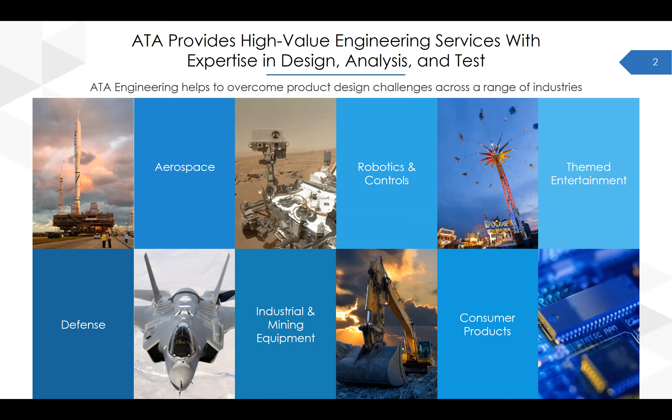One of the other things ATA Engineering does is that we are a value-added reseller for the Siemens Digital Industry Software Suite. We offer training and a lot of free resources, as well as hotline support for a variety of Siemens products, including NX, which is the subject of today's webinar.

The Siemens product lines that we support currently include NX CAD and CAM, Solid Edge, SimCenter Star CCM Plus, SimCenter Femap, SimCenter Nastran, which was formerly known as NX Nastran, SimCenter 3D, and Teamcenter.

We offer a support hotline for all the products we sell. And very interestingly, we are also the developer of the official SimCenter Nastran training materials, and we are the preferred North American provider of SimCenter Nastran training. We are a Smart Expert partner and a platinum level solutions partner with Siemens Digital Industry Software, with validated expertise in Femap, Star CCM Plus, and SimCenter 3D.

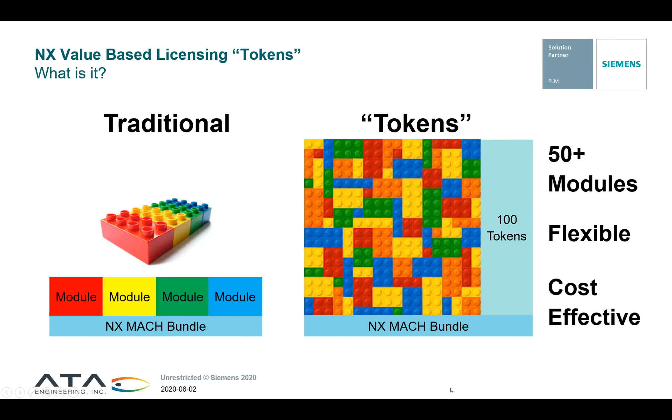It provides a really flexible approach to using the different modules, as well as a cost-effective way to do this. So instead of having to buy one of each of these modules, by buying just the token pool, you can access over 50 modules within the NX design environment.

So how is this licensed? The main way we license it is value packs. You can buy them in 100 or 50, just like you would buy any other NX license, so there are product codes that the ATA team can quote you and sell you. They are on a subscription basis, so there's no perpetual option. Again, the numbers are either 100 in increments or 50, and you can mix and match them together. This is a floating mechanism, so you put this onto your license sheet and your FlexLM license, just like any other module, and it will move around to any of the designers within your organization.

Some frequently asked questions around this: tokens are focused more on casual usage of the design modules. If it's a specific thing, again advanced sheet metal is an example, and you're in that every day using it a lot, tokens may or may not fit that bill. If you go in every so often, that might be a good way to use the tokens to access that functionality, but for ones you're in all the time, you might still go with the actual add-on module.

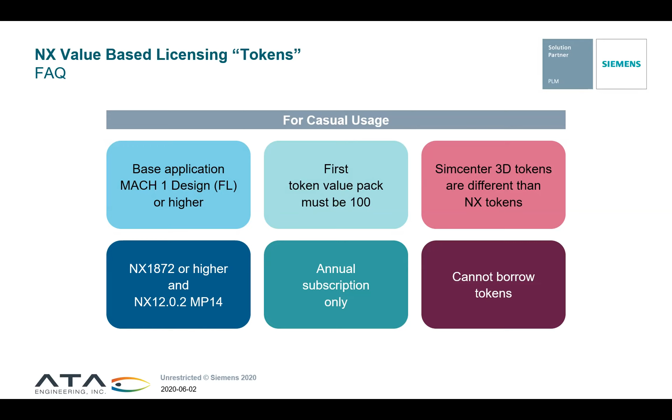As I mentioned, it is subscription only, so you do have subscription, and this is set up on an annual basis. That's how they are sold. The other thing is, from a borrowing perspective, we cannot borrow the tokens. So if somebody wanted to put those on a laptop and go remotely, that's not something we make available at this time.

So how does it work? What's the mechanism for the user? Do they have to do anything special to be able to access this? Let's look at a simple use case. If we had 5 users, say they all had the Mach 1 floating seats, and we had purchased a 100 pack of tokens.

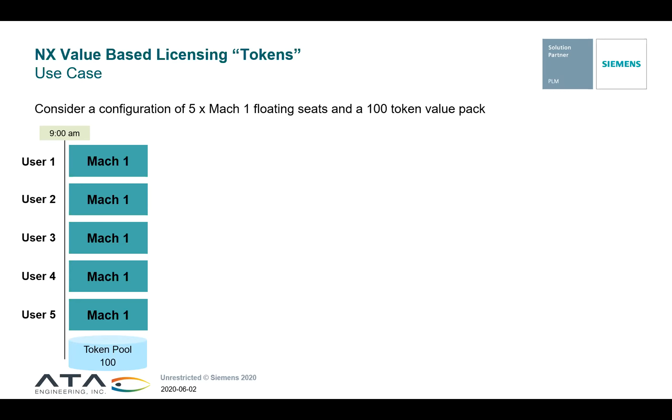So with that, you can see each person is going to be licensed with the Mach 1. And then we have the token pool at the bottom of 100.

So if I started off and I wanted to use the human modeling, each module within the token pool has a little bit different value based on what their list price cost is. In this case, human modeling requires 26 tokens. So from our 100 token pool, it draws that down to 74.

So there's 74 tokens for the other 4 users to access. I might continue working, and now maybe user 2 steps in and starts using the Realize Shape. That pulls another 35 tokens out of the pool, so now we're down to 39.

At this point, if the other 3 users would like to access something, as long as the functions they're going to pull are not above 39, they're good to go. If it was above that, they would have to wait until somebody was done.

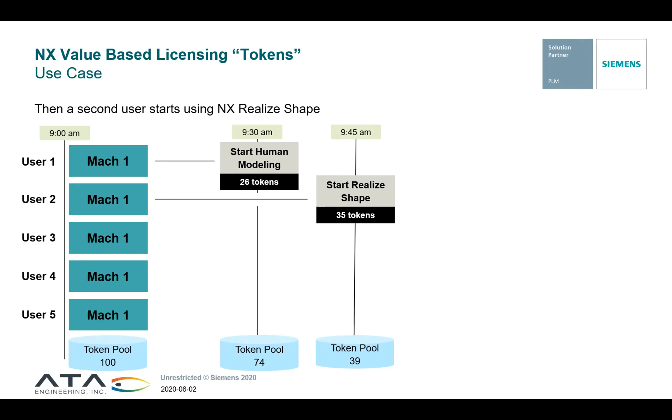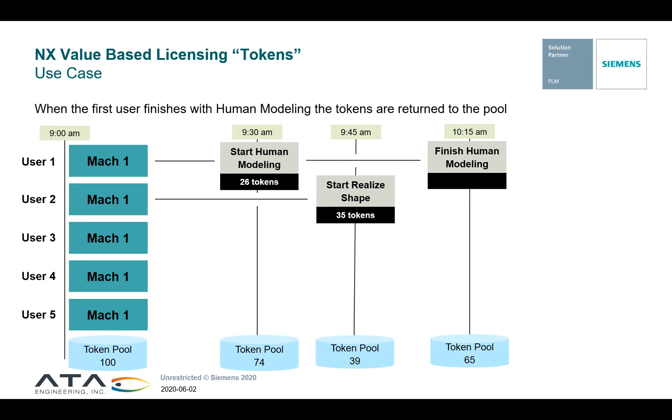So just like that, if I finished after maybe 45 minutes working with the human modeling, those 26 tokens go back into the pool. You can see we've bumped it back up from 39 to 65, and other people can go in and use functions off of the token pool.

Same thing, maybe another user comes in and starts the routing base, pulling 25 tokens there. So that fluctuates throughout the day and the hours people are working on it, but it's just like floating licenses you'd have. You go in, use so many, and put them back.

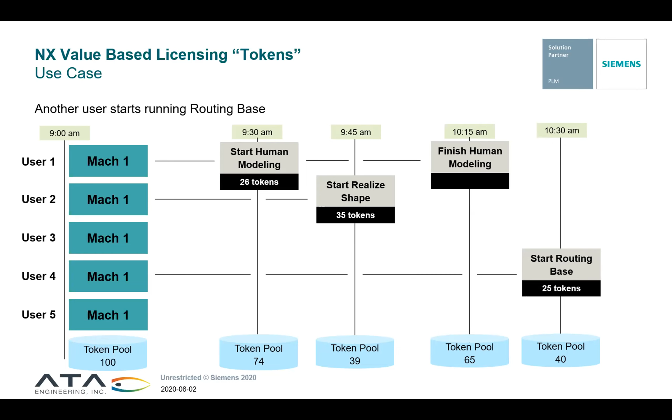So you always have the 100 tokens. You're not throwing those away when you're done with it, or it doesn't completely lock those up. It is that pool, and the level of the pool goes up and down throughout the day.

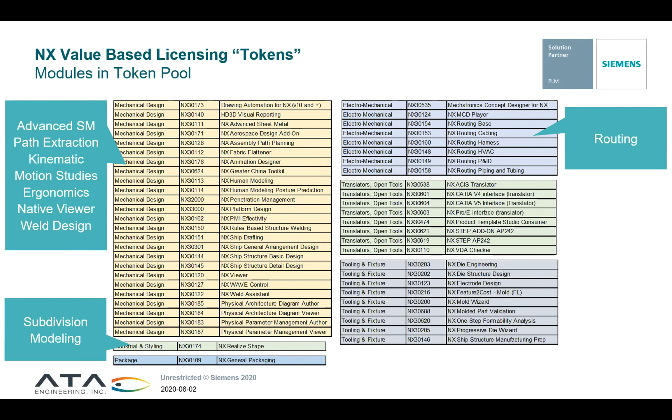And then another area is our routing capabilities. So whether you're doing harness design, piping and tubing, all of those things you can access through the tokens as well.

And then another one we talked about were the translators. We have some direct translators for CATIA and the Pro-E interface inside Pro-E Creo. Also some specialized ones for ACIS, which is the Autodesk modeling kernel similar to our Parasolid, and Step 242, which helps with model-based definition. Those are some things that would be very valuable.

Again, things on a casual use basis — we're trying to go in, translate something, bring it into the system. And then also a number of tooling and fixture design: many of our tooling wizards, whether Mold Wizard or Progressive Die Wizard, any of those types of tools are in there, as well as costing, tooling costing, and sheet metal flattening.

So for complex parts, we use the one-step formability. And then finally, if you look across the list, there are many industry-specific tools that we have created, and those are available through the token pool.

So we have aerospace design. If you're doing aerostructure design, there are a number of tools focused at that industry. Things like ship design - for those building cargo ships, container ships, anything like that, there's a set of tools available. And for the automotive industry, we have our vehicle design automation, which you'll see examples of as we go through the rest of the demos. Finally, for the machinery industry, the mechatronics concept designer helps with motion studies as well as connecting out and performing virtual commissioning.

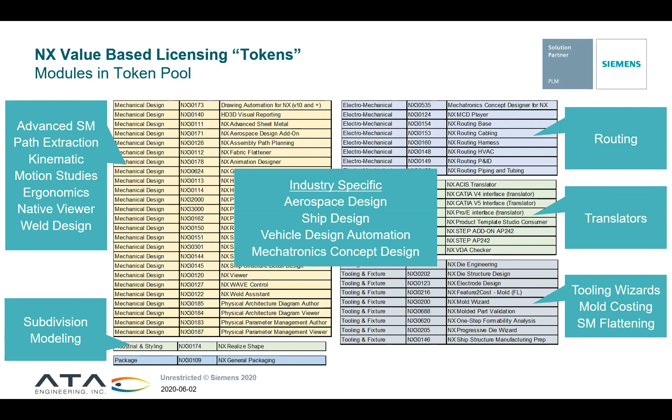So let's take a moment and look at some of that functionality. We won't go through all of them in this short time, but let's look at some of the key ones we have here.

One thing a lot of people ask me about is, I'm working in assembly sequencing, which is part of assemblies, but I'd like to figure out how to extract that part from the assembly. In this case, we're looking at an aerospace example - can we remove that seat out of the plane without hitting into things? Do we need to take other things out? This is a high-level example, but a more realistic one you might run into is...

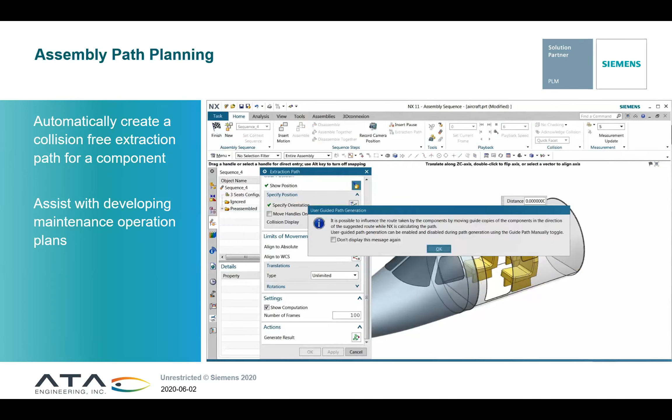We're working in an engine compartment, or working to remove some pieces, and we want to help develop that maintenance operation. How do we let the system calculate and figure out how to get that part out of there? Could we get it without having to take all these extra pieces off of, say, the engine or whatever compartment we're working in? So what this allows you to do is go in and specify the start point and the end point.

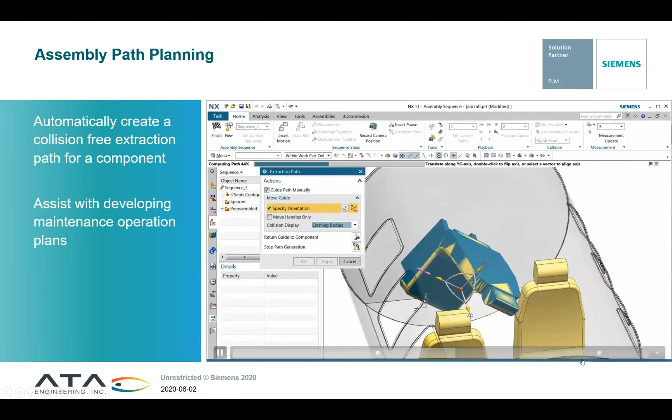The system will then go in and figure out that calculation - can it in fact be removed without colliding with the other parts in the assembly. One nice thing is, besides seeing the actual extraction path, it also creates a faceted body that shows the path that solid has taken, something like a swept solid that shows you that.

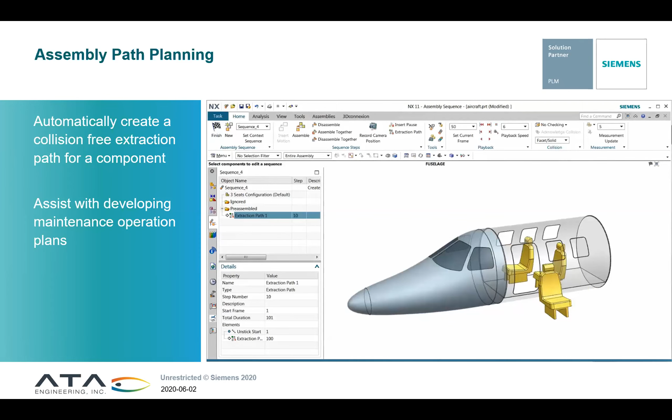So again, something that some customers wouldn't necessarily go out and purchase by itself, but by having it in this pool, now you have a productive tool to help your designers. Another one is human modeling.

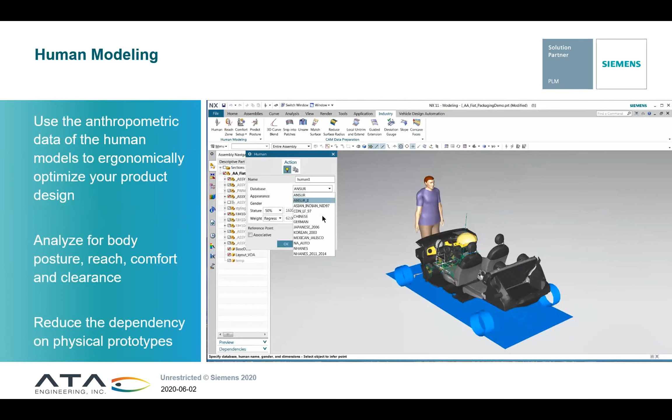We have the powerful capabilities of our Jack and Jill software, and we have much of that built into the NX environment. So we have the anthropometric models that we can put humans in. Why would we do that? We'd want to look at their posture, what their reach zones are, how comfortable are they - it looks at all the ergonomics of the people. You can check for clearance and for vision.

And that's really what we're showing here, that you could go in and add those into the model. Now you say, well, we just dropped them in as standing, but you can control them and set them up. So as you're working, you can go ahead and put them in and control how their hands are gripping, how they're seated, how their legs are bent.

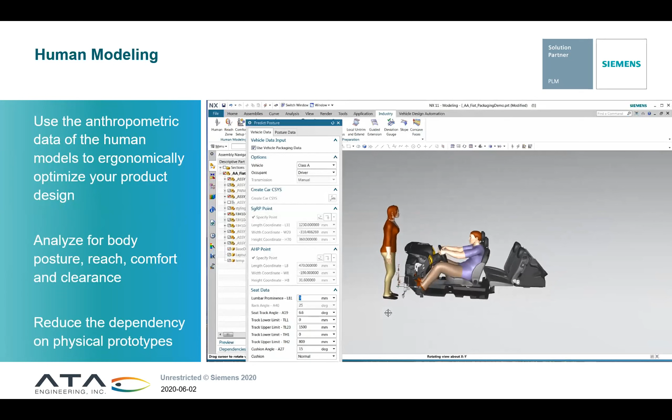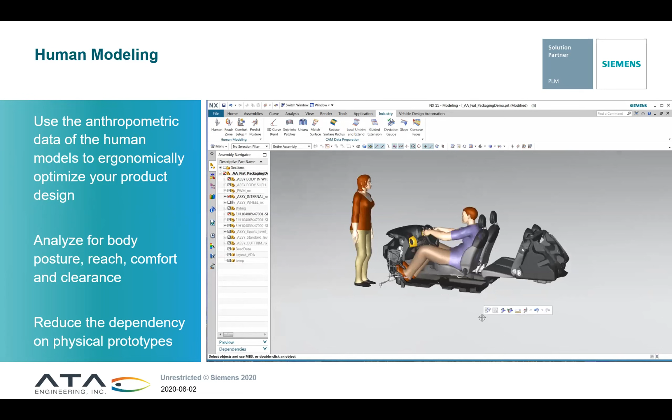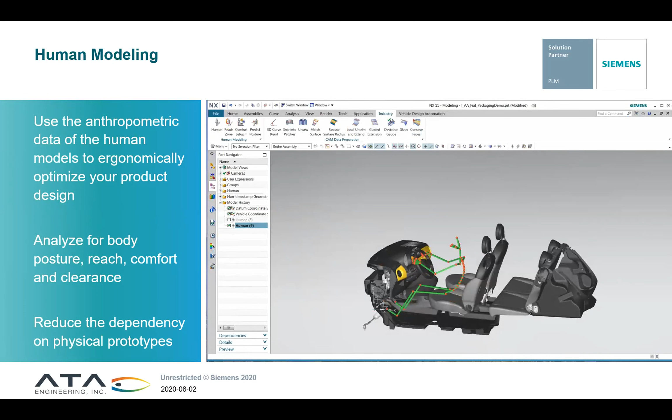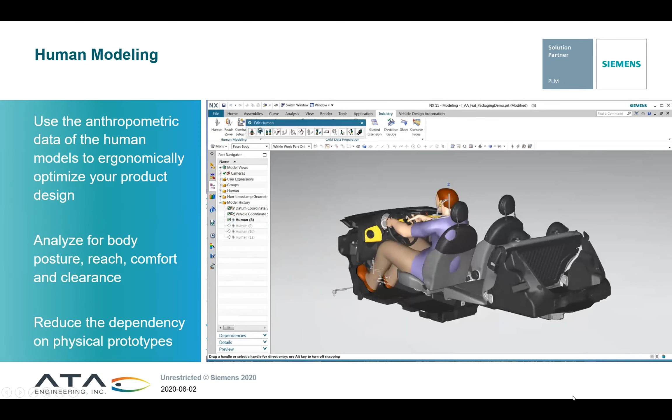But you have all the actual data about those people based on the 50th percentile or the 90th percentile - how would they go in. So whether it's automobile, aerospace, or heavy equipment you might be designing, you can see how you can add those people in and use that to study the difference. There's a big difference between, say, the 50th percentile male in the vehicle versus a 50th percentile female - what problems might we have with either person besides just moving the seat up for reach and other things?

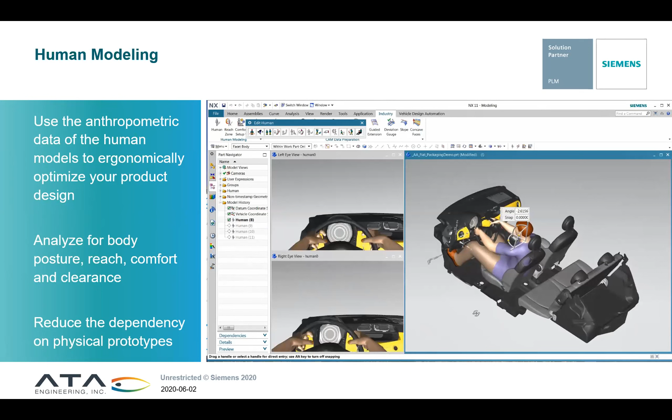And as I mentioned, the other area is vision. Just by moving that occupant's head and using the drag handles quickly to move that head as they look down, right or left, you can see what they can see on the instrument panel, or if you had them in the entire vehicle, where they have blind spots, where they can't see as they move around and look in there. So again, trying to reduce those physical prototypes, you can see how much you can get done inside the human modeling.

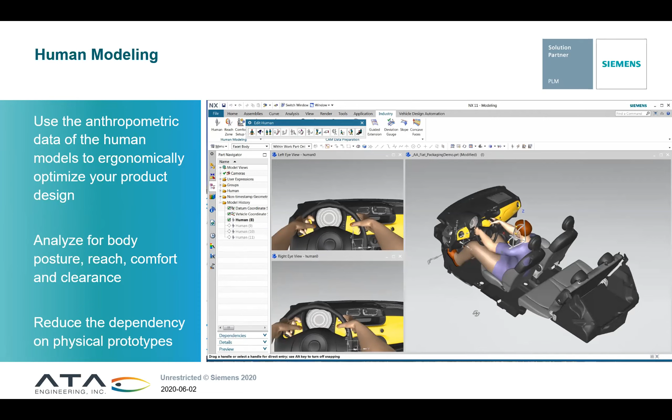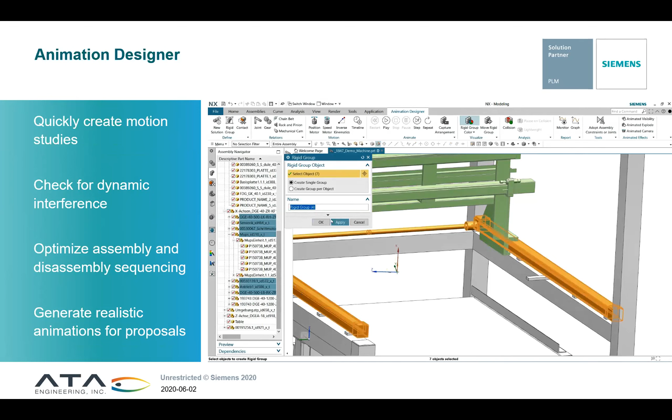Another tool that comes in handy, using more of a machine design example here, is the animation designer. This tool has been in NX for a couple releases. It's really a step between just doing assemblies and assembly constraints, and going to full NX motion. It's that intermediate spot where I'm not really worried yet about loads and accelerations. I just want to put something into motion, check for interference, see how the entire kinematics of it move, and determine, hey, do we need to extend something? Do we need to adapt?

It's a very visual environment. As you go in and select the groupings of the components, you can either use the on-screen selection or do things from the assembly navigator. As you're building that up, you also see the coloration on the screen, showing the different groupings, as well as applying the different joints that connect those up to one another. A very simple process.

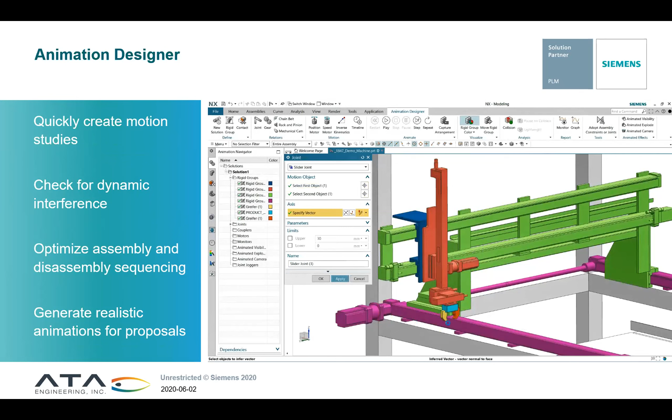What's nice is this is all scalable. As you move from assemblies, you could inherit those assembly constraints. As you move into motion, you can pull this information forward. So things you might see are physically dragging it with the drag handles, or you can use the timeline. We can put different things to showcase, hey, with these position motors, it moves it to a position. It's easy to copy and mirror so you can show it going out and then coming back, and very quick to set those up.

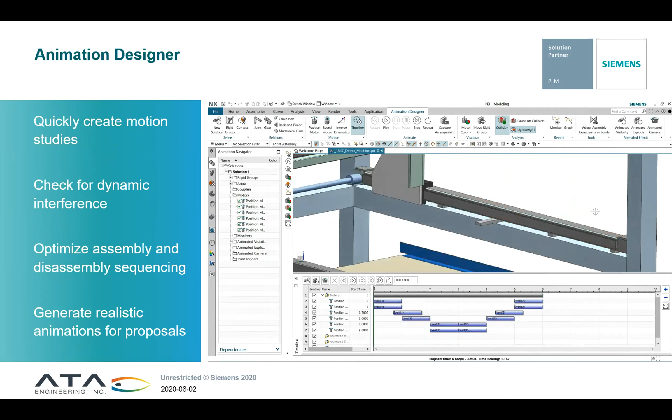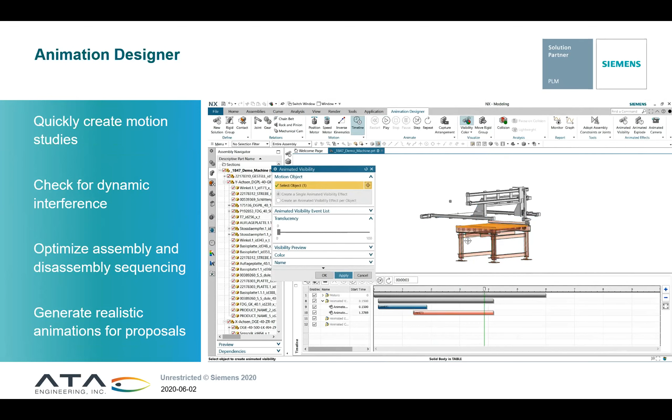Right away you can check interference, measurements, all of those types of things that you can build into the design. Finally, one other area people use it for is to create realistic animations for proposals. Instead of just giving them drawings, you can capture this information and create an animation of it. You can have things turn on and off, have exploded views of the information, all using just this graphical drag and drop to develop those. That gives you a chance to see the final product out of that.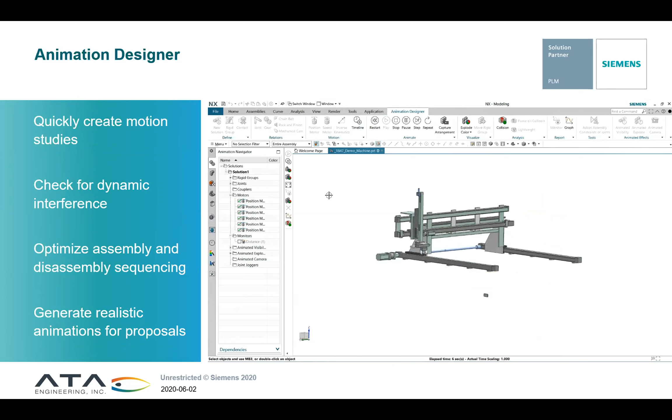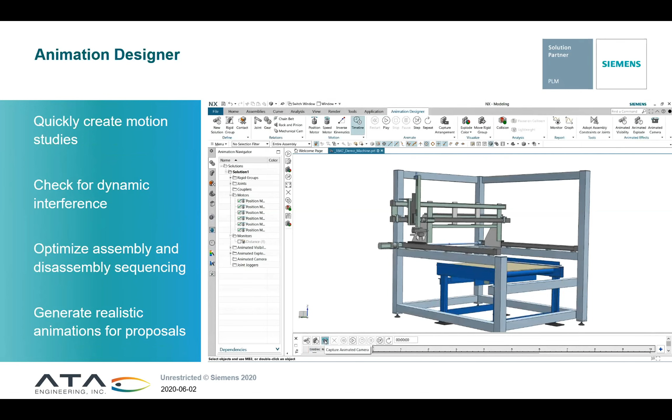So a number of tools inside of this animation designer really come in handy. And again, under normal circumstances, somebody would have to buy the add-on module. Now with the token pool, you could access and make use of this.

Another one that's industry focused is aerospace design. There are some very specific things as you're doing aerostructure development, like the flange so it matches up to the skin of the aircraft, the way the ribs are developed, or the shelf and step as these stringers come together. Very specific things that would take a lot of extra modeling time if you just used standard functionality.

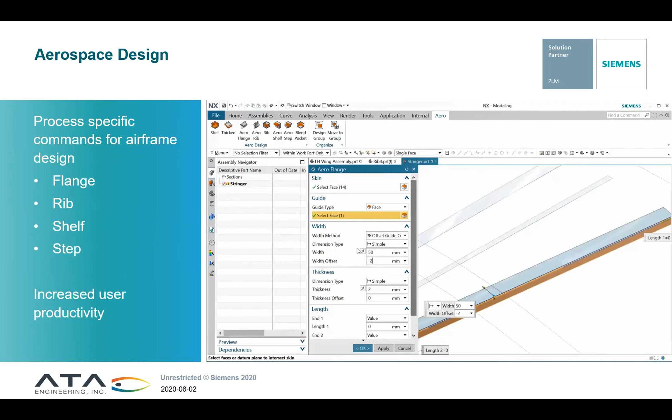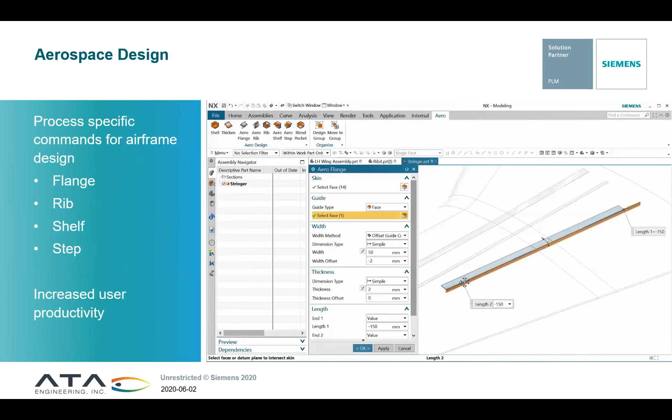These are very similar to using NX sheet metal, very similar look and feel for the user, with the on-screen preview, the drag handles, all of that. It really speeds that process along as you're working on those interior structures for the aircraft.

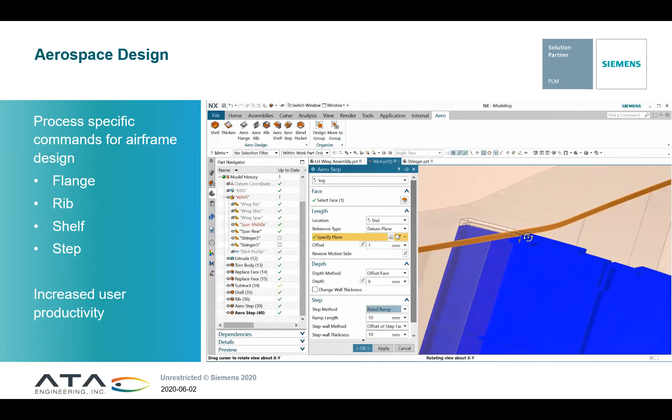We looked at the flange, and here's a look at how the step works, as those two elements come together, you need to offset and move that geometry. It's as easy as picking the face, picking the direction, and giving it the input, and it understands that. So if you make changes to one part, it's associative and will update these aero features as well. Very powerful, quick way to help with that development.

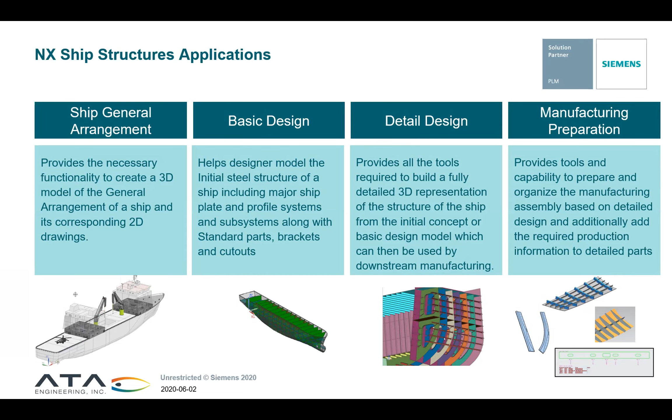Also, as mentioned, there's ship structure development. All of these pieces are part of the token pool, whether you're doing the general arrangement of the ship, starting with basic design, or getting into the detailed design of all the structures for the ship, as well as out to manufacturing prep - all of those are available.

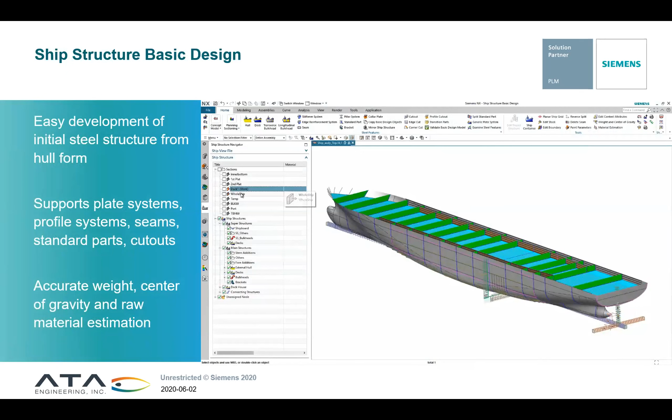This example shows a bit around the basic design of taking that initial ship hull and breaking it down into some of its key sections. In this case, we're digging down into building one of the bulkheads, using the geometry that's been developed up front. Instead of just using standard modeling functions, the ribbon bar really has all of these knowledge-driven apps to help you with this process.

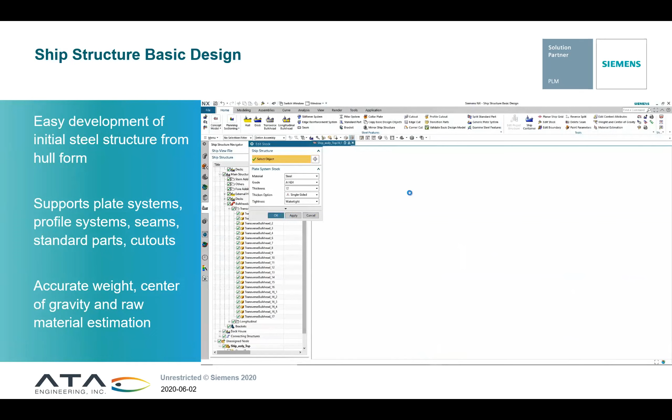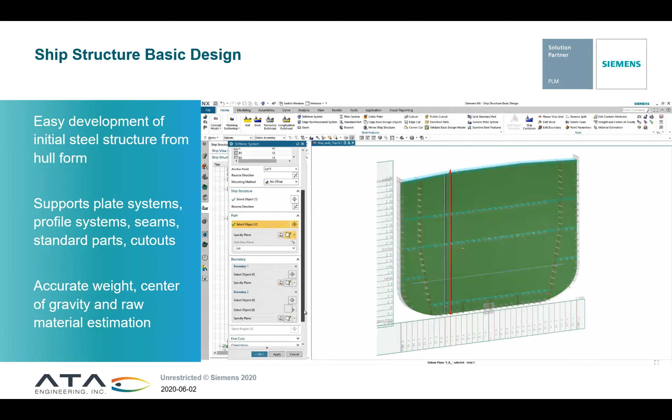As you go in to build that structure, you can develop the bulkhead, set the different thicknesses, divide it up into the different plates, doing the seams and different structures you're developing there. Whether it's the stiffeners, you can see how easy it is to generate those, and again, everything is built with these intelligent dialogues.

So all you're having to do is go in and fill in that information and place those on the screen. This has been a very good competitive area for us in ship structure development, because of all of these specific knowledge-driven tools that you can go in and work from.

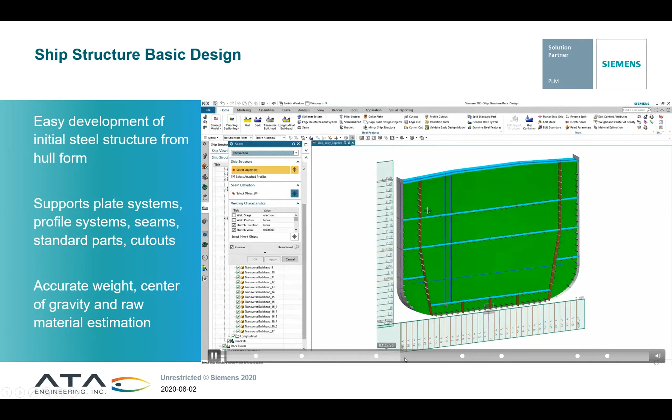Things like the stiffeners, the brackets, the libraries - all the user has to do is pick the drop down, put in some values and select the geometry. Placement is automatic. All of the things the designer would need are taken care of.

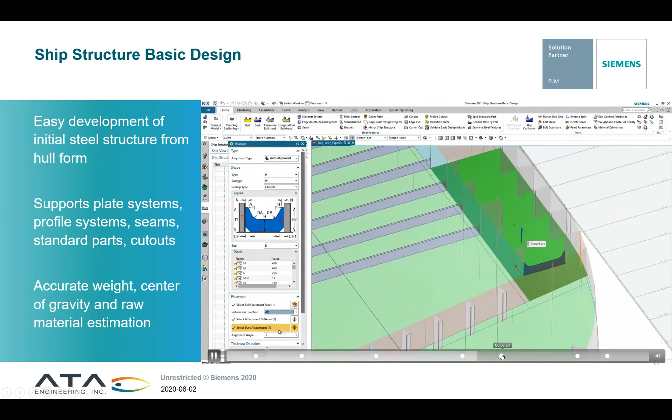So things like this, where you might have a cutout for a manhole, or it might be a lightening of the structure - very easy to do for these cutouts. Just select the parts that are around it, and it goes ahead and creates the geometry for you.

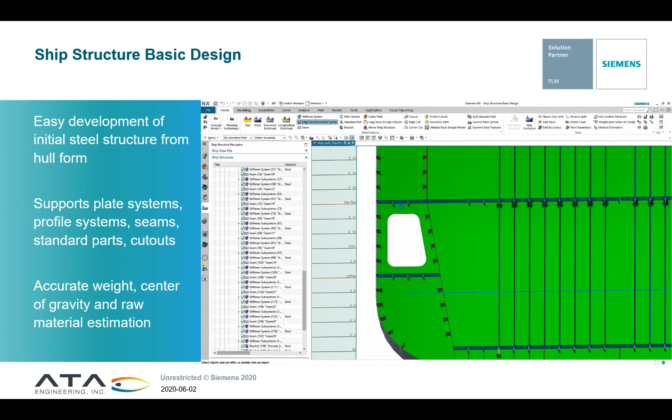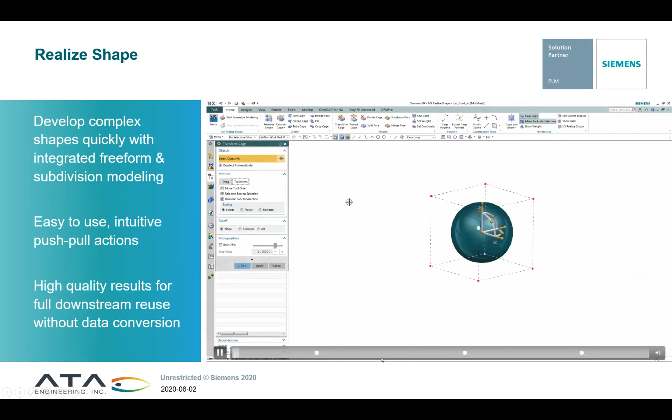So just some different ways of how you can tackle that with ship design, and why we've done well in this particular area. So another one is more in styling and concept design - the Realize Shape.

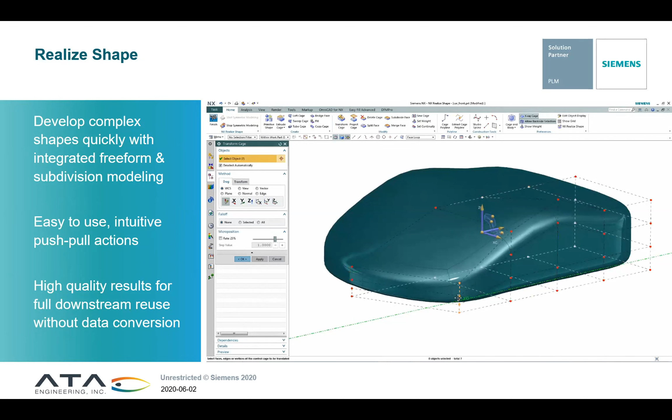With the Realize Shape, this is an environment to start with a primitive - you could have a sphere or block, that type of geometry. Instead of having to create sketches and all these datum planes, it creates the cage over the top of the geometry, and as you can see, it's very fast to develop.

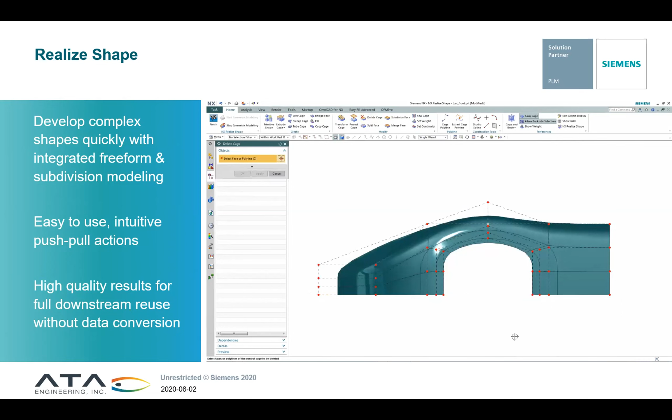In this case it's more of an automotive hood example, but we use it on consumer products a lot, where you can go in, push, pull, drag, resize, subdivide - all the things you would need to give yourself the definition you want, and super fast.

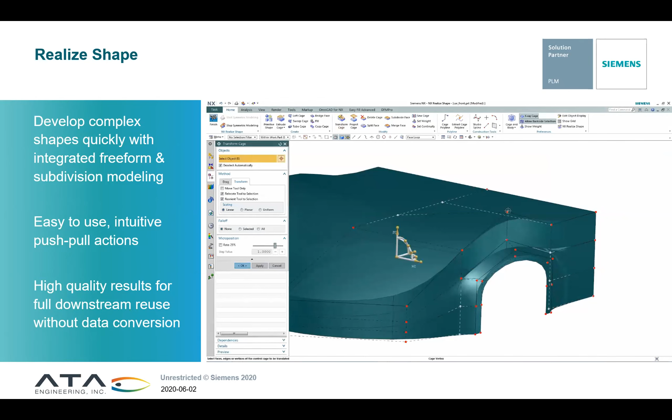You couldn't create all of the underlying curves and sketches to do what we're doing in a minute or two - it would take a long time for you to develop all of that. And then you'd have trouble if you had to change your mind and wanted to change the design intent. It would be very difficult to go in and do that.

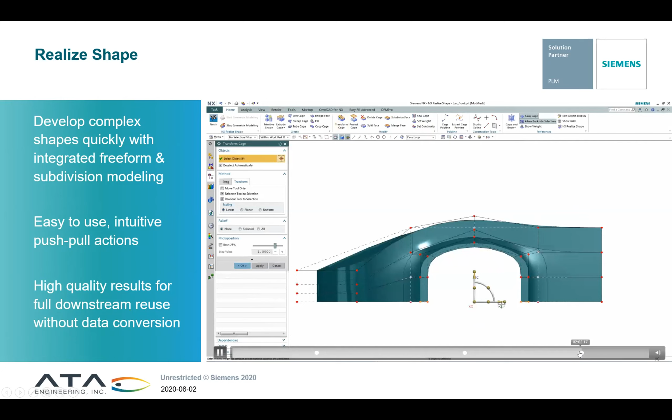This has been around for a while now, but the main thing is allowing people more access to it through the token pool. Any of the geometry created with Realize Shape is just like any other body or feature - it's part of the history tree, and it allows you to go in and analyze.

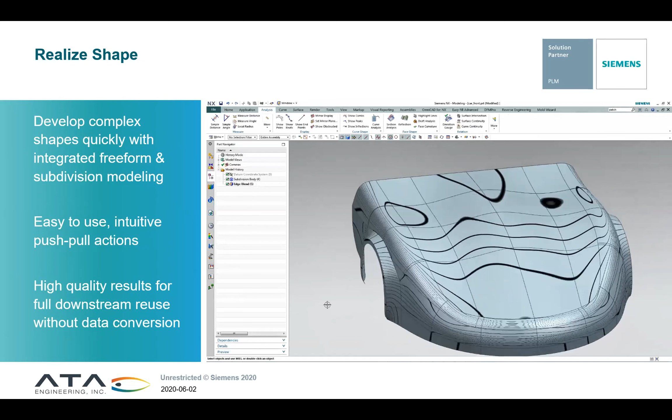This is using the analyze shape functions to see highlight or image reflection across the body, so that you can go in and see that. Then any additional features, your edge blends and surface blending, all of that comes together quite well.

And then the other one we mentioned is general packaging - a number of vehicle design automation tools. Similar to what you were seeing under ship design, this covers vehicle architecture, occupant packaging, vision tools, and the like.

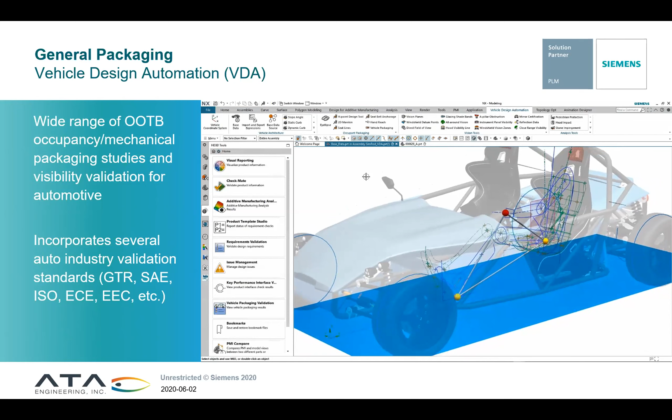Here, this is starting out with the 2D person. We showed the NX human on the other side, but it actually can use the information from this. So if we went in and did the occupant packaging in 2D, when we drop in the NX human, it will use that to help position and change all of the grips and how their legs and arms are positioned.

All of this has many out-of-the-box tools. It incorporates a number of automotive standards into it, so it is a wizard-type base. As you select each one here, the user follows that to develop each segment they're going through.

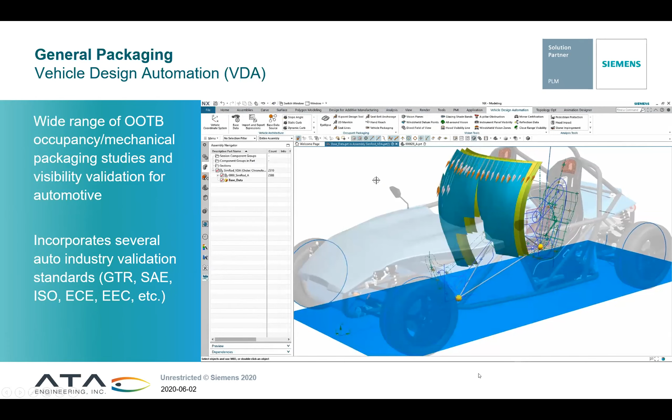You can see here, this is for reach zone - it creates that surface geometry. If that person brought their hands off the steering wheel, how far could they reach? What could they do there?

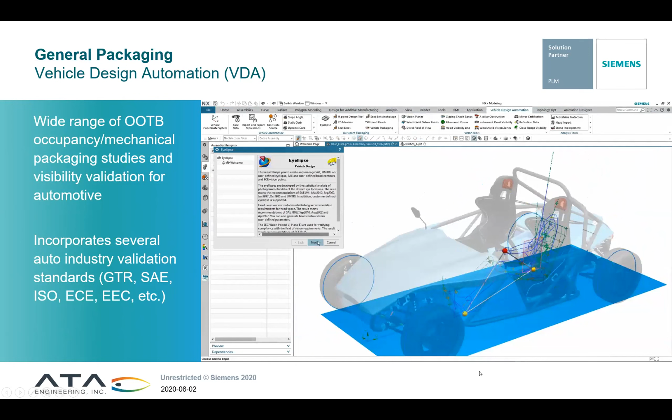Other things, same vision-wise - we saw how with NX human you could bend the person's head and see where, but here we can use this to see what their vision is and actually mark geometry. So in case somebody's looking out over, say, the hood of the vehicle, how far could they see before the geometry stops them off - so here we're looking for that hood visibility line.

So again, a number of different additional tools, but this just gives you some initial thoughts about what is possible - what can you do with this, and how does that operate inside the environment?

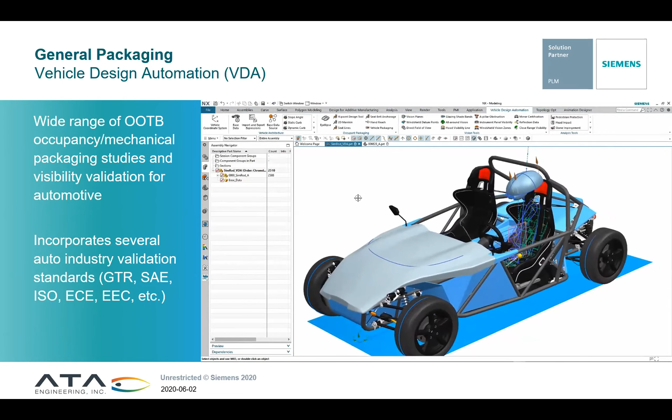And then another popular one is really the routing side. So being able to have the routing base plus, in this case, creating the electrical harnesses. Instead of having to use a spline, which doesn't maintain tangency if you move the components, in routing we use smart ports that are attached to the routing components, so everything stays connected.

You can easily go in and create the main path with the spline. The heal path is nice because it automates that. You're basically picking the two locations and it's generating everything in between. So you develop those out, and that's really what the routing base brings to you - how do you create those paths quickly for all of your objects.

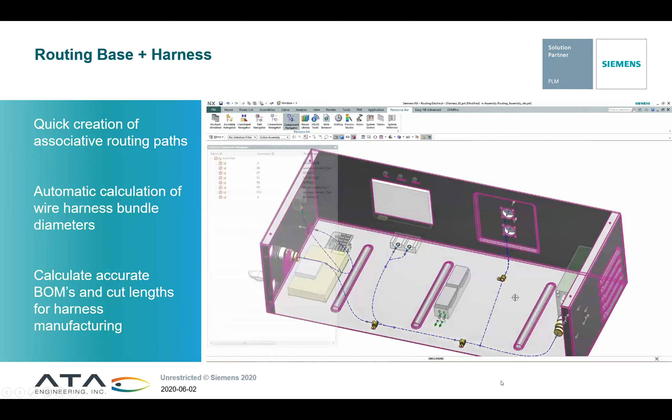Then as you continue on, the next thing is how do we connect over to your ECAD system. We're open so it doesn't matter which ECAD system you have, so you can bring that information in - the component connections list or your net lists can be read in. Most systems have those as a text file. If you have the Mentor tools, those have a tighter integration, so we don't have to pass files - we can do a direct connection.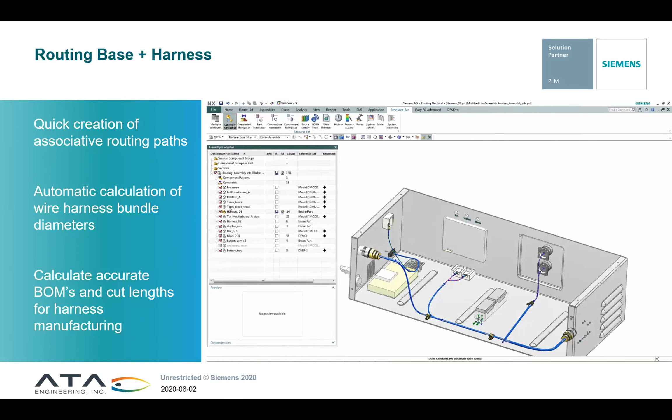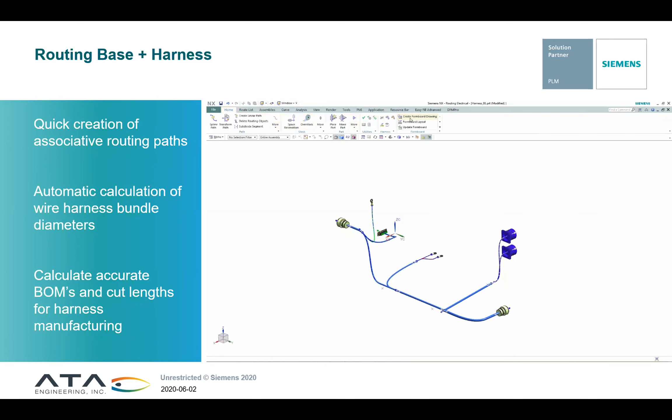The idea is you're taking that information and it knows the gauge of the wire, it knows the color of the wire, it calculates your cut lengths - all of that so you're more accurate when you develop these harnesses. So you have the 3D harness, and it also has the tools to flatten this out for manufacturing - create your manufacturing form boards and set this up. You can use the smart tables to put out all of the information about the pins and connectors so you can generate the correct harness.

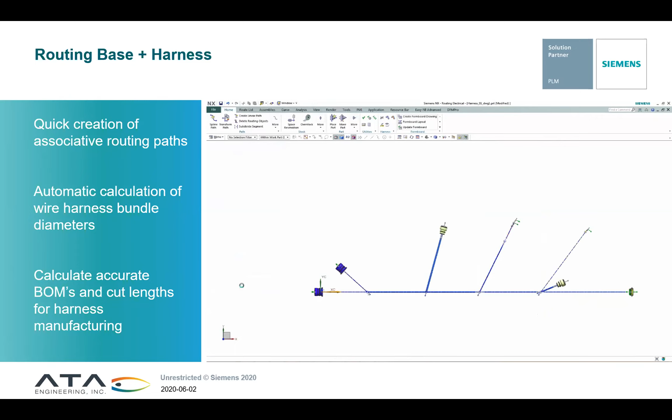We already talked about this a little up front, but to reiterate the translators - there are direct translators for CATIA, Pro-E, and Creo, and also neutral ones. ACIS, as I mentioned, is the Spatial modeling kernel, similar to Parasolid. It's doing that exchange of information, as well as any model-based definition. In the aerospace industry, and even automotive, STEP AP242 supports the model-based definition - your PMI, tolerancing, dimensions, notes and things like that - 242 supports that exchange of information.

These are ones we get asked about a lot too - how could we use those? And that's part of the token pool.

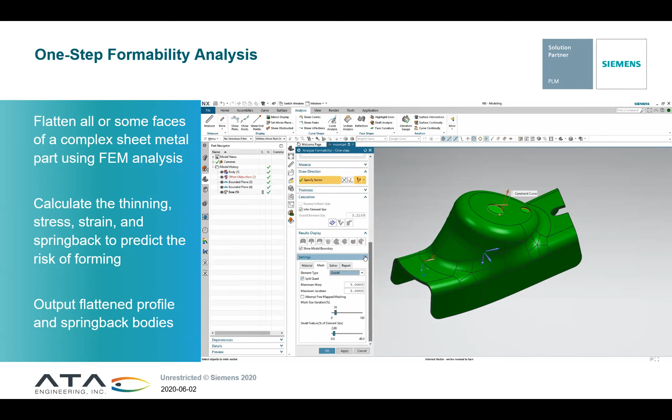And then finally, the last function we'll showcase here is the tooling and fixture side. If you have parts that are more formed sheet metal rather than just a 90-degree break, we can go in and perform the flattening of that - taking those complex drawn shapes and flattening that geometry out. Besides just creating what the blank looks like, it's calculating where the part is thinning, what the stress and strain on the parts are, and you can also predict spring back with this.

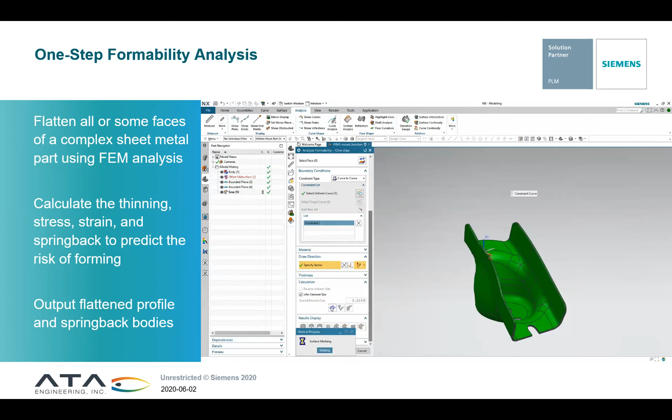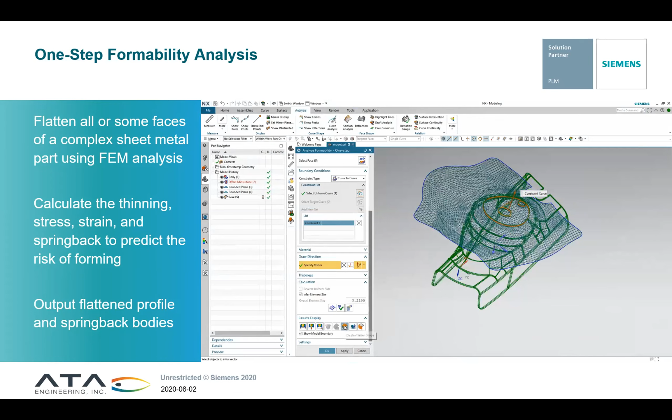So a number of these things you can use to generate that, and get an idea up front - can we make this part, can we create the tooling for that as we put it into progressive die, we'd be ready to go. Everything's based on the finite element method, so it does a mesh and takes into account the material characteristics. It's very easy for the designer to use because it's step-by-step - you follow the dialogue from top to bottom and get the output from there. A very quick way to accomplish those tasks.

So the question becomes, how do I get started? We talked about what you'd need to purchase, and then how do I learn this - the documentation has both details and step-by-step instructions. If you go into the NX documentation under Realize Shape, there's information, Animation Designer, and if you go down to routing, ship structures, vehicle design, or human modeling, all of those are there for you. So I recommend digging into those areas as a starting point to see how to use them and how you could gain the most advantage with them.

So, why choose this method over, say, some of the others? I think there's three key things. The value to all of our customers is that increased productivity.

We showed a lot of the industry specific ones because we've taken a lot of the knowledge that we've gained and added that into NX. So instead of you having to do just normal modeling functions or drafting functions or assembly functions, we've put those modules in that increase the productivity. So we have over 50 modules in there today. We will continue to add. I know specifically there are some more coming with the June release of NX.

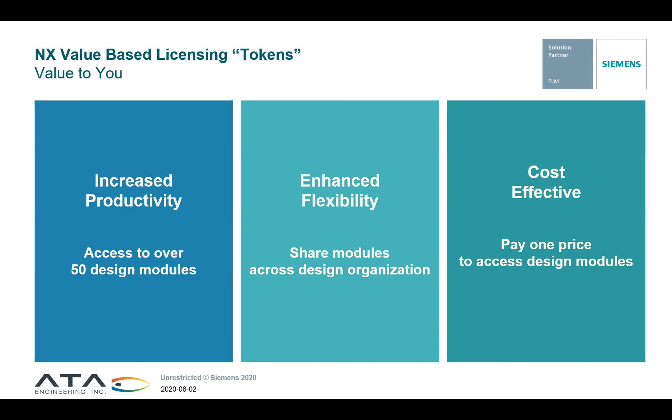And then finally, it's a cost-effective method, right? There's one price for access to all of those modules that we show in the list. So all of those things come at one cost instead of incremental cost across all of that. So your productivity, your flexibility, and the price point, I think all of those help make a better story for each company to go out and to invest in using the tokens.

So with that, I think we've covered all of the things that we had in our agenda. So I'd like to open it up for questions. Maybe Scott has seen some come in over the chat, or there may be some other ones posted. So at this point, I'll hold with that.